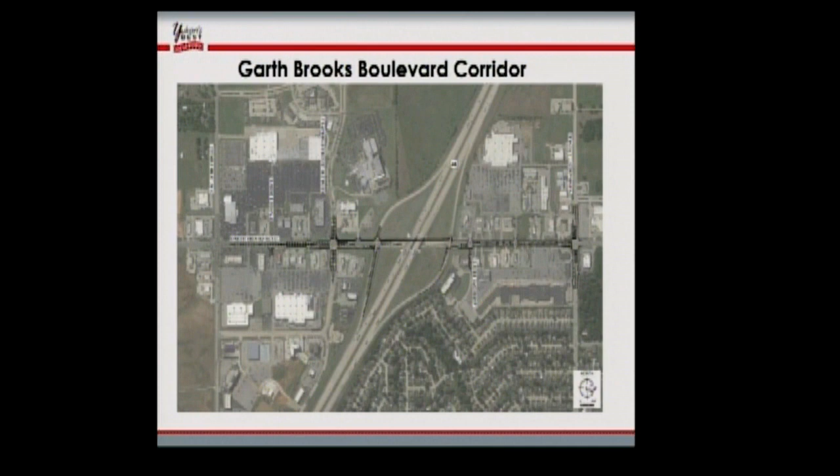We want to talk about the CRISAA grant we got from ACOG and how we worked with them, and how much goes into a project. I was asked the other day, it's a simple overlay, you just mill and overlay it. But when you're talking about federal dollars, there are certain things that have to be done for environmental review, for a set of plans that can be bid. ODOT is the administrator of that. There's a means to the method, and this project right now is estimated about $1 million. This is basically an overlay from Vandament to Main Street. It will fix the spots in the pavement that have kind of failed. This was a relationship-type deal working with ACOG, and we have a couple of other things as we go forward.

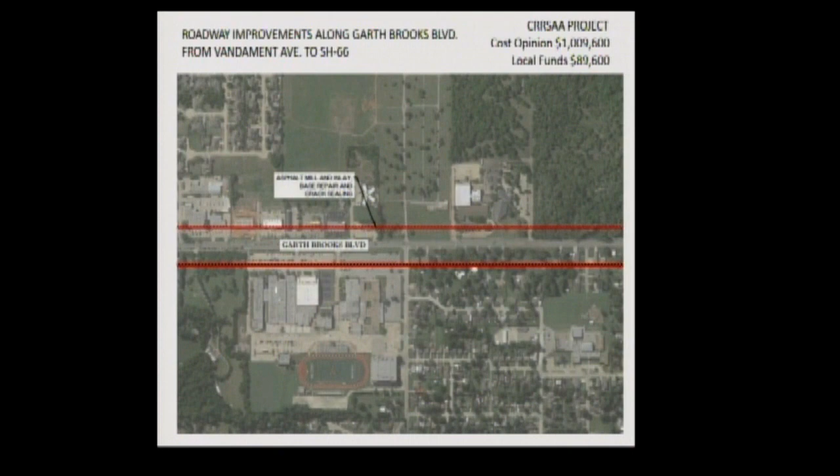On the ODOT side, Tammy has worked real hard with the city engineers to work with ODOT on one of the pieces of the Garth Brooks project, to limit the amount of investment the city's going to have. This was one of the items in the traffic study. We're adding dual left-hand turns coming onto Garth Brooks and coming off Garth Brooks on the on-ramp and off-ramp. This is estimated at $3.2 million right now, a significant investment that ODOT is doing. We do have to do the plans for this project, so we'll also have to pay 10% of whatever the price is.

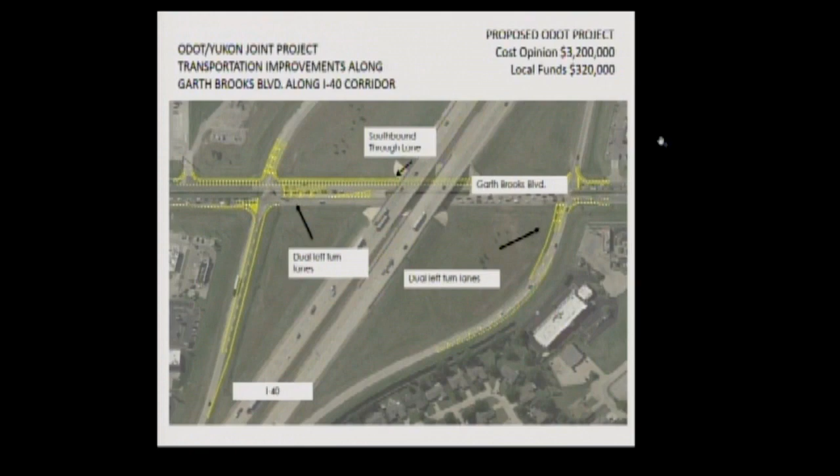One of the things we'll talk about too - multimodal is a big thing, and when we're getting federal dollars, that's why we talk about 10-foot sidewalks or trails, because if you have both, that gives you points in the process. So it gets us some help on these projects. What we're trying to do is the TAP grant, which covers the sidewalk or multimodal trail - this helps in our application. We're trying to put both projects out to bid at the same time, or similar time, or maybe even incorporated together. I don't know how it's going to work, but that's something we're working with ODOT on. It's an $864,000 project. I've asked why we're doing this, but with federal money, multimodal gives other people means to move through or around the project safely with bicycles and walking.

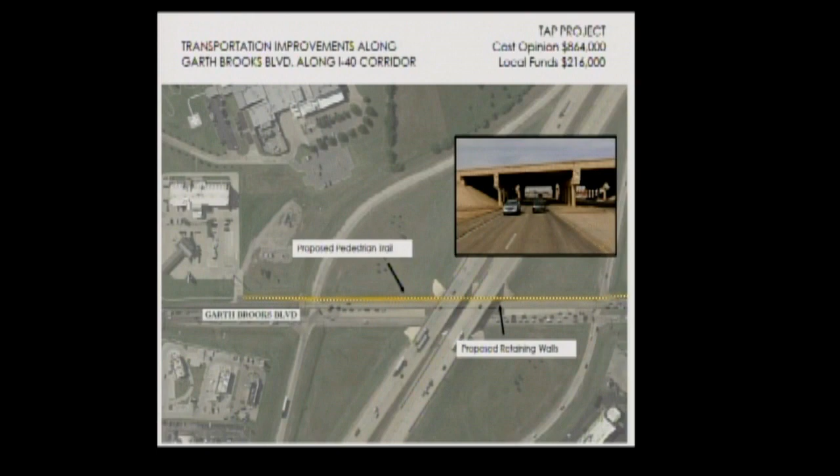And that's why we talk about the Garth Brooks Trail. That was part of the deal. That's probably helped us with the CRISAA grant.

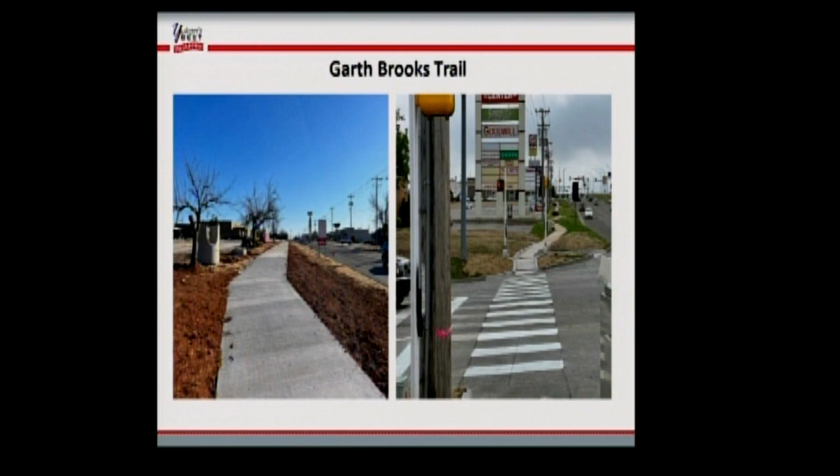As we move forward, we're trying to make sure that we have this multimodal trail basically from Main Street all the way to 10th Street. That allows commerce to go back and forth, so if people want to walk or ride a bike, if there's any conflict, they have plenty of space.

Health center improvement, this is one of the improvements that we did, trying to alleviate some of the problem. There was not a dedicated left turn east or westbound onto Garth Brooks, so that was added at $312,000. So we're trying to do things to alleviate the traffic and help the traffic. I know we get a lot of complaints about the hospital side, they're being delayed a little bit, but we're doing what we can to take care of those issues.

Smart grid, that was a deal where we connected all the lights together with the smart grid system. Basically, the lights before had what they called loops on all directions in the pavement. So we're going from a pavement type system to what they call a camera or detector or smart grid system. With the loops in the pavement, when the asphalt moves, it's actually a wire, it looks like a wire in commercial installation.

It gets nicked, cut, torn just from the pavement movement. That's why we moved to the camera system, because the lights work off that. So we went from some intersections having like 16 loops to what we have today, the smart grid, which is one item. So if we have a problem, it's one item and not multiple loops.

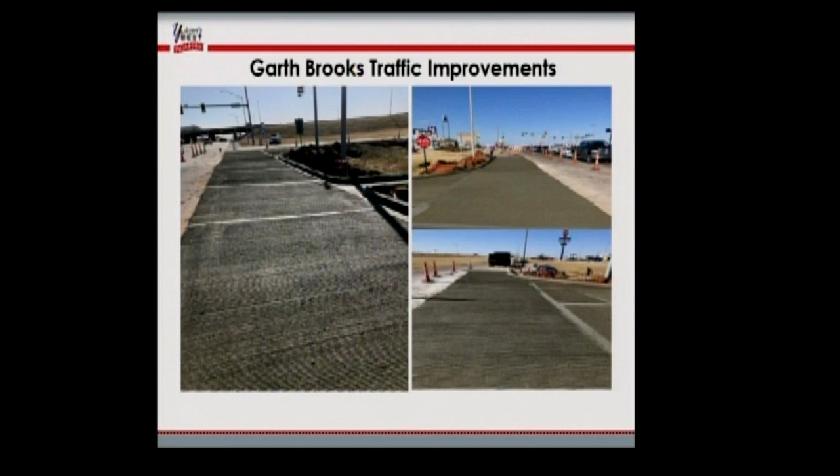This is one of the past projects. The reason we brought this forward, it was broke up into two different phases. There's north of the bridge and south of the bridge. This was a relationship, done with us contracting both of the asphalt projects, but we actually worked with the county for stabilization underneath the asphalt. So they come in and stabilized.

One of the good things about working with the county, they can provide the labor and the equipment, but we have to buy the material to stabilize the base. And they worked with us on this project. Like I said, I wanted to talk about relationships and the importance of relationships, and we have to build those bridges with the council and those entities such as the county commissioners. They're willing to work with us on other projects and have actually approached us, and we'll be meeting with them in the future.

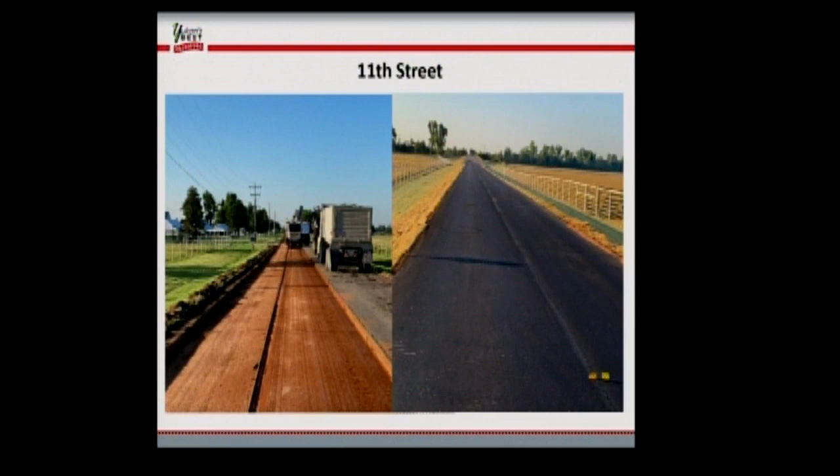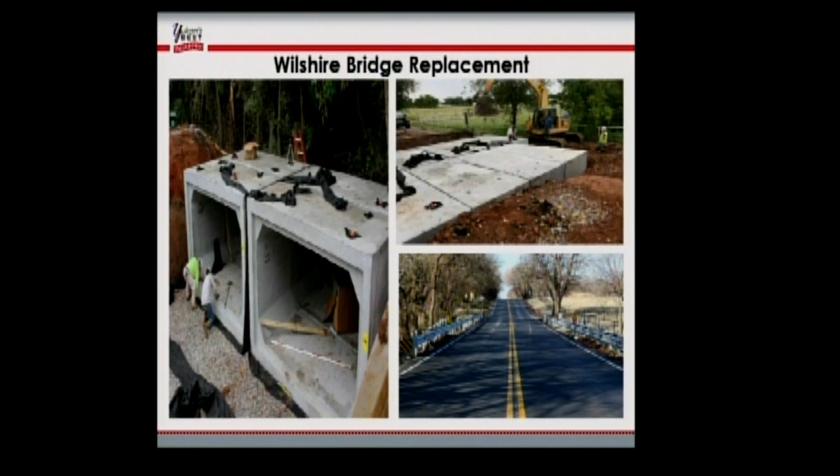Now, this project was Wilshire Bridge as well as the road. This was also a relationship with Oklahoma City, with the county and us. Oklahoma City paid for half of the cost of materials and the project.

The county provided the labor for the base and stabilization. So Oklahoma City has been a good partner on those roads that are half shared by us, as well as any drainage issues that we've had as a shared facility. And that project is almost 1.2 million, and they paid for half of it.

And while we're talking about this, we had worked with Oklahoma City, if you remember right, de-annexing the east portion, basically from 11th Street all the way to our city limits, and they basically have taken on the repaving or rehabilitating of Wilshire going east.

So that saved us quite a bit of money that we did not have to pay. That has been a good relationship, because at the time we did not have the money. I think it was 2.8 million, which we'd have had to pay half of, and we did not have that to spend because we have other needs within the urbanized area.

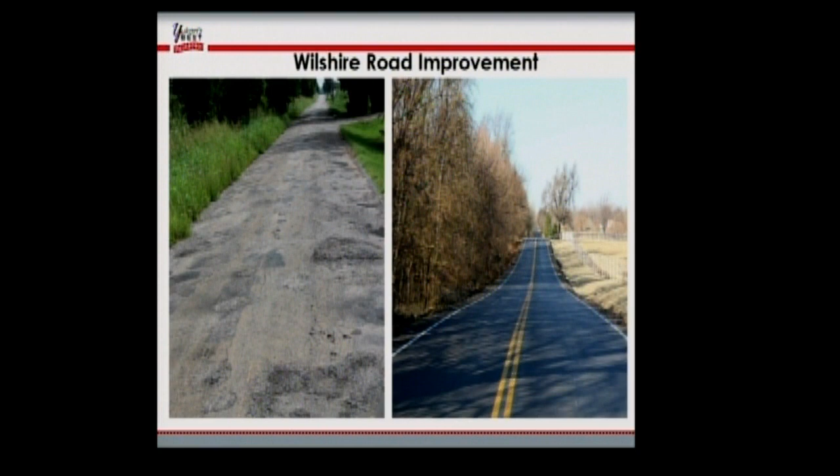We want to talk about future projects as well as what's happening to us. Northwest 10th Corridor, we have some things we'll be bringing to you to talk about. We'll talk about Cornwall and Northwest 10th, but we want to make that a project that is needed, but also we need to consider in the future, because everybody that drives Northwest 10th and Garth Brooks knows about the traffic and the issues that we have.

So this is a future thing that we need to take into consideration. We do have the large apartment complex going in within Oklahoma City city limits, and it's going to impact us even more. The whole idea of looking at 10th Street is to try to get the traffic to move faster and more efficient, so maybe we can take some of that off of Garth Brooks, because people are creatures of habit. If you go down Garth Brooks every day, you're going to keep going down Garth Brooks. This is a relationship deal too, as we're trying to work with Oklahoma City, but they only work with what's in their city boundaries.

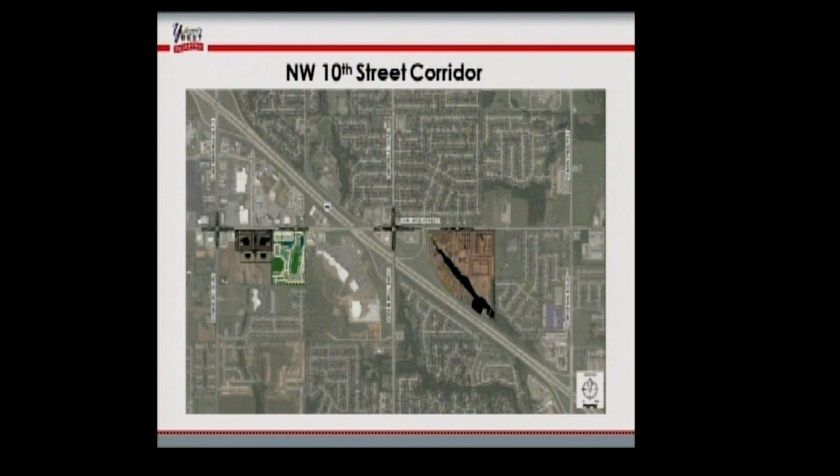We're also going to talk about drainage. We do work with drainage, and this is a proposed project, actually a project that's supposed to be worked on this year. There is some drainage issues at the roundabout at Healthcenter Parkway. With all of the paved surface and the changes in the drainage basin, this is something we're going to have to take care of to allow access to the hospital if somebody comes in from the south. This is estimated about $500,000 right now, depending on what we have to do.

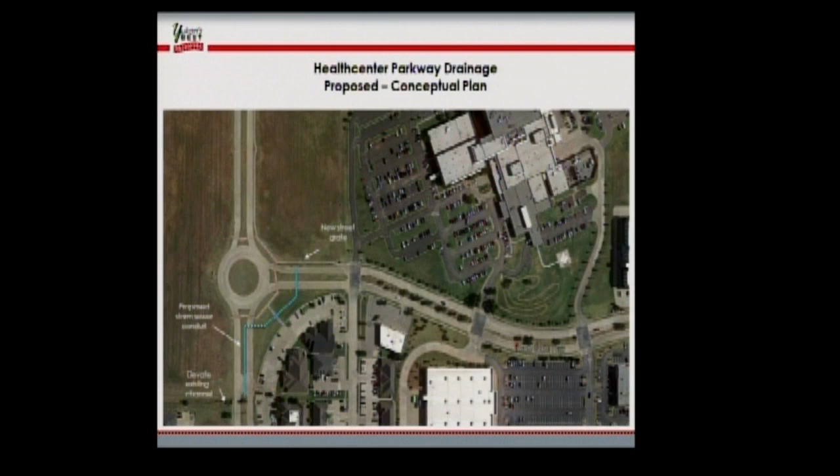This is another relationship project—a box culvert that we had to replace at Sara and Wagner. This is half in Oklahoma City, half in our city limits. As we went through and discussed it, we did this with them and they split it. It was a $117,000 project, and they paid their half.

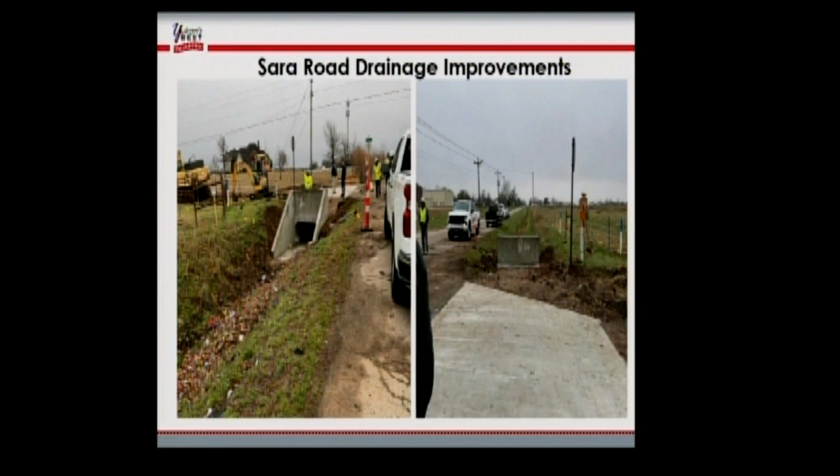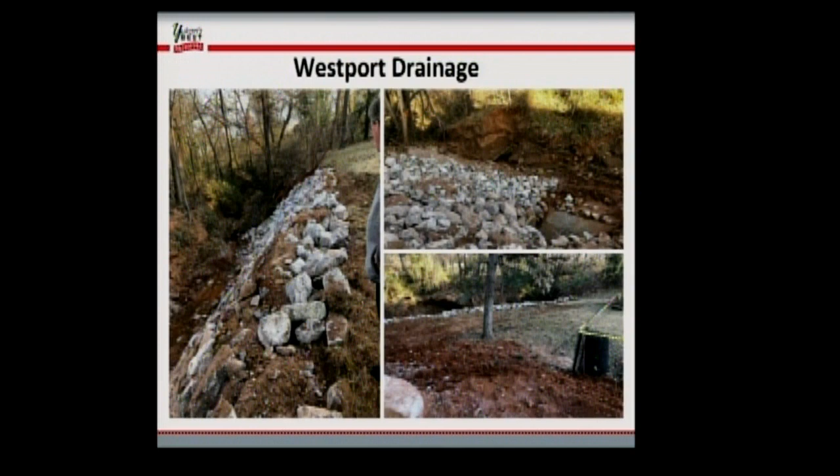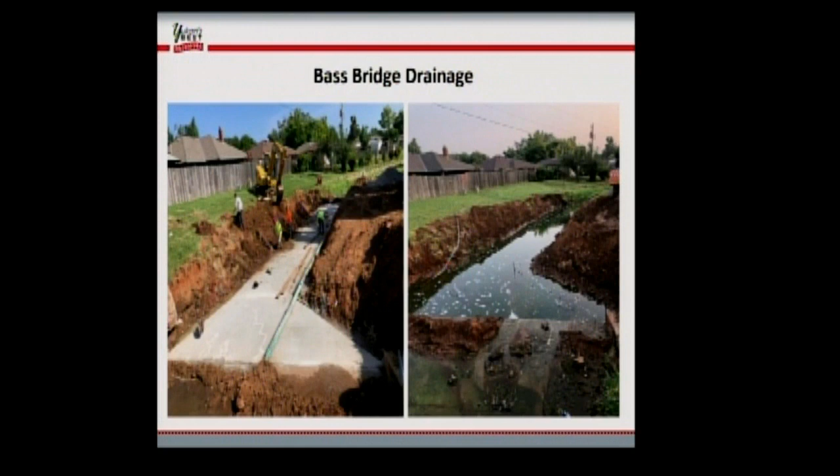Westport drainage—we just want to let you know there are a lot of things people do not see that's hidden behind houses, beside houses, and we're trying to work on those as well. So this is one of the projects we worked on. We also had a Bass Bridge drainage area that we worked on. Like I said, we are looking at all areas—there's a lot of this people don't see that has to be done. This project has been completed, as well as the Turtle Creek drainage project, which was $112,000. Drainage projects are very expensive.

I had an individual approach me the other day asking why we need an engineer on some of these projects. Well, some of these projects have certain issues that have to be looked at very closely. For example, this one is actually in a floodplain and a floodway, so there were special things that had to be engineered, starting with what's called a 404, which involves the state. It has special permitting requirements through the Corps of Engineers, so we had to work on this, and it took several months.

That was the other thing I was asked—why does it take so long for some of these projects? Well, there's a lot that goes on that a lot of people don't realize. Just the engineering alone, like I said, took the Corps several months. There's surveying, engineering, making sure we don't increase flooding or flood anybody else out. Every action we take has a reaction, so we have to look at it upstream and downstream. Our city engineer, Robbie Williams, is real good at that and making sure we do not impact anybody.

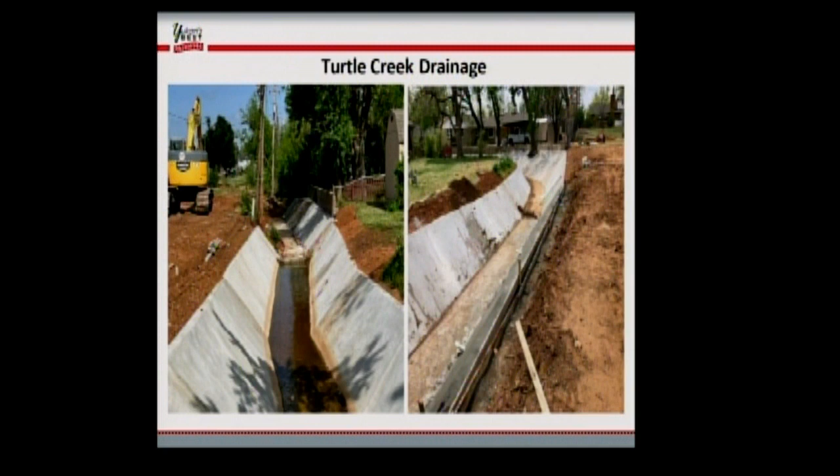This is another one—since all the development in the basin, this is the Kings Ridge drainage project. This is one we're working on this year as well. We're waiting for the surveyor to get everything surveyed, and then we'll do this through our contractor, on contract, on demand.

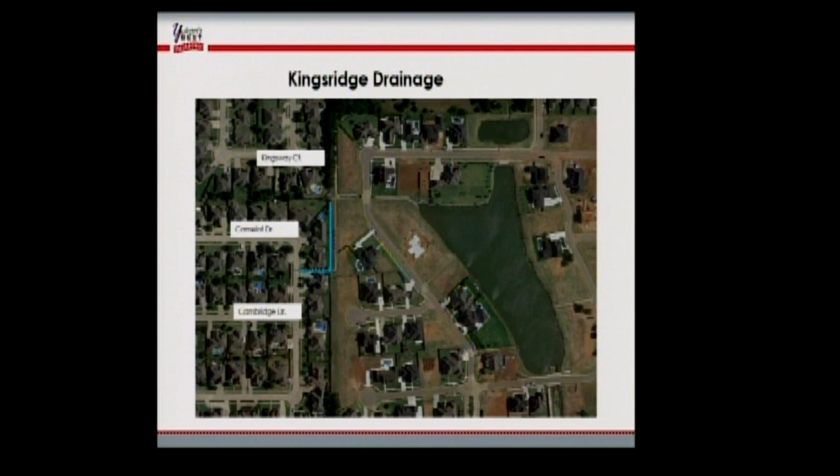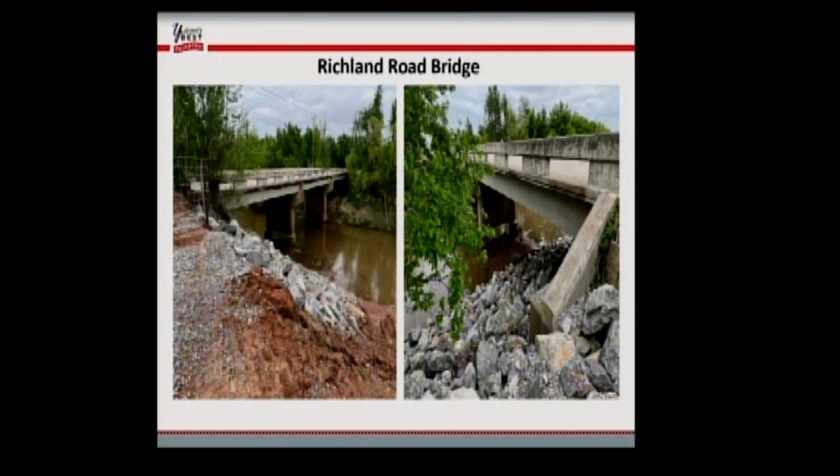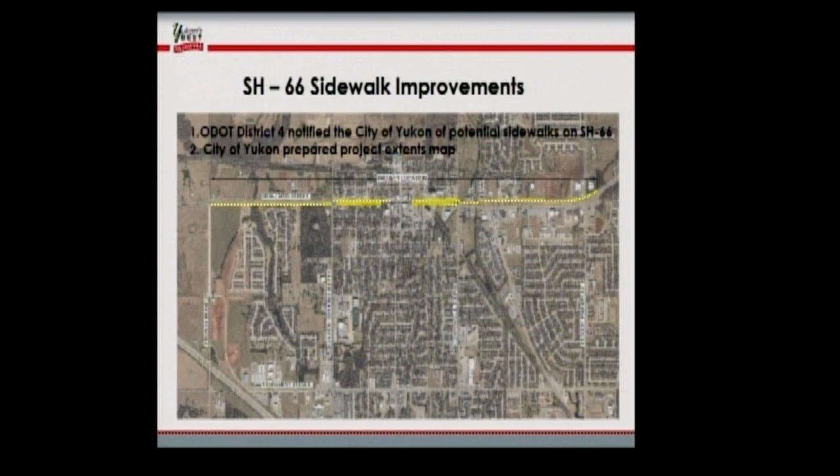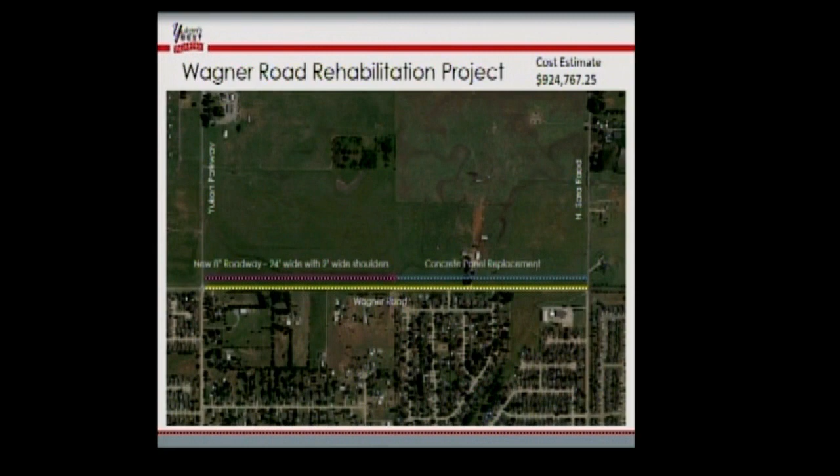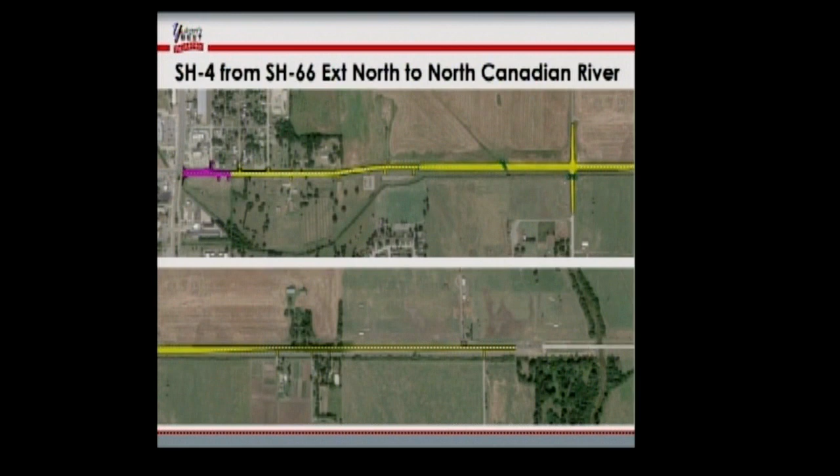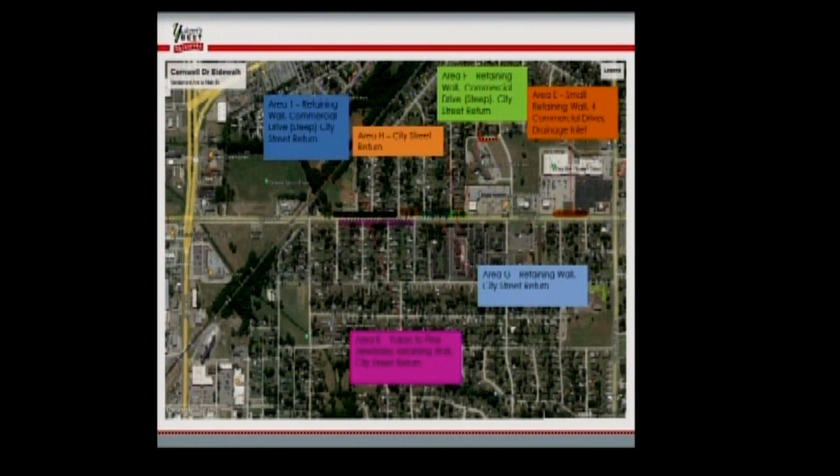Is Oklahoma City paying any of that for their side? No, we're trying to stay within our right-of-way that we actually have control of. If you remember right, we have control of the curb cuts on Yukon Parkway as well as Northwest 10th. So that gives us a wider area, and this is going to be within the boundaries of the right-of-way. Now, we have talked to Oklahoma City and let them know about what's going on just for courtesy.

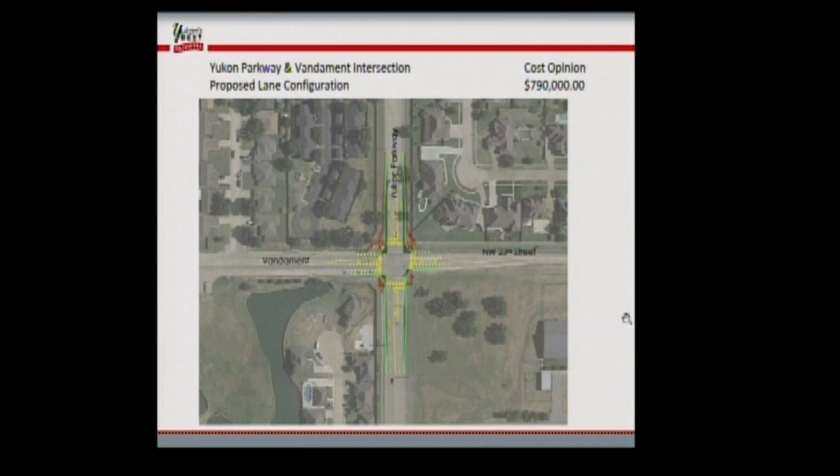Let's talk about the wastewater treatment plant. We've talked about this several ways, but this is a real great partnership with the county that we're going to talk about.

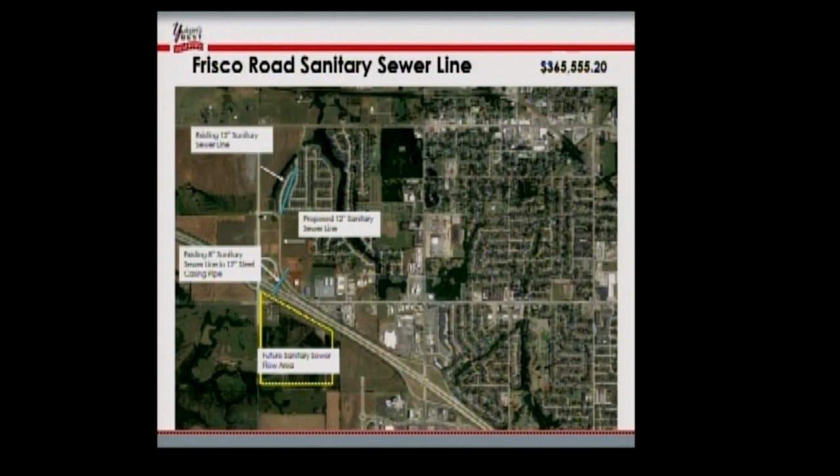Of this project, if you remember right, there was 10 phases, estimated at $8 million. At the time, it was estimated in February 2nd, 2023. As you know, our funds for $8 million, we don't have that in the bank. The county actually had some funds that they were grateful to allow us to access and use for part of this project. They received ARPA money.

With the ARPA money, there were requirements that it could only be used for water, sewer, or storm sewer. So with a lot of talk with the city managers in the county, Tammy, Matt over in El Reno, and Tim in Mustang, they all worked real hard, as well as the mayors in the cities, to work with the county to obtain the funds.

For us, they are giving us $3,725,433 to apply towards this project that they were not able to use. This will go a long ways. We'll still be 4.3, 4.4 million short. So that's something, as we go through the phases, we're going to try to figure out which are the best phases that would need to be done.

Their order will change. We're currently in the design process right now, working with DEQ. Hopefully we can finish that in the next several months and see where we're at, so we can go ahead and get some of these projects going.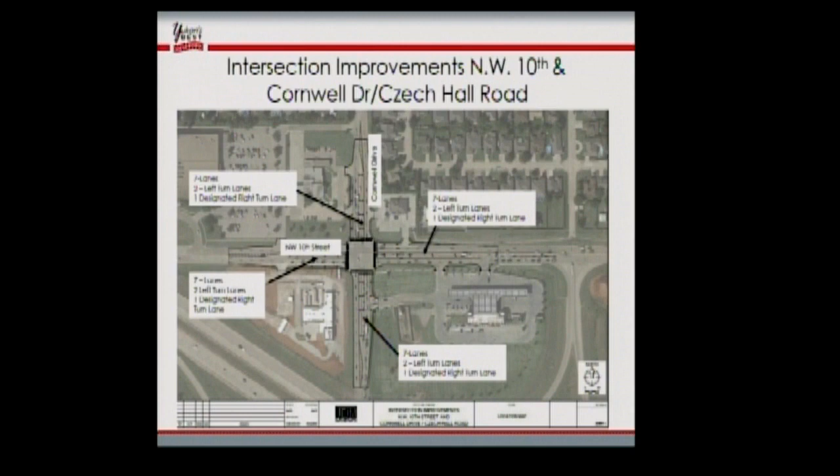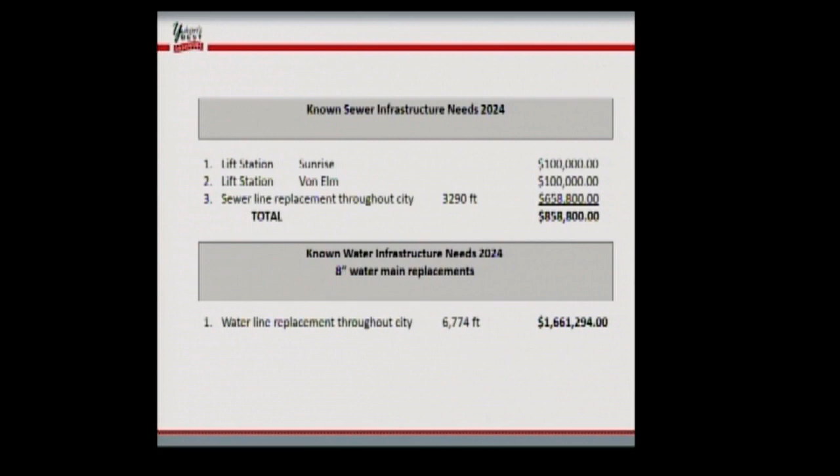As we go forward, these are just some ideas of projects. We got 2 lift stations that need to be upgraded, about $100,000 apiece. We know right now we've got about 3,290 feet of sewer line that needs to be replaced today. We've got about 6,774 feet of water line. This is just a list of streets that we know about.

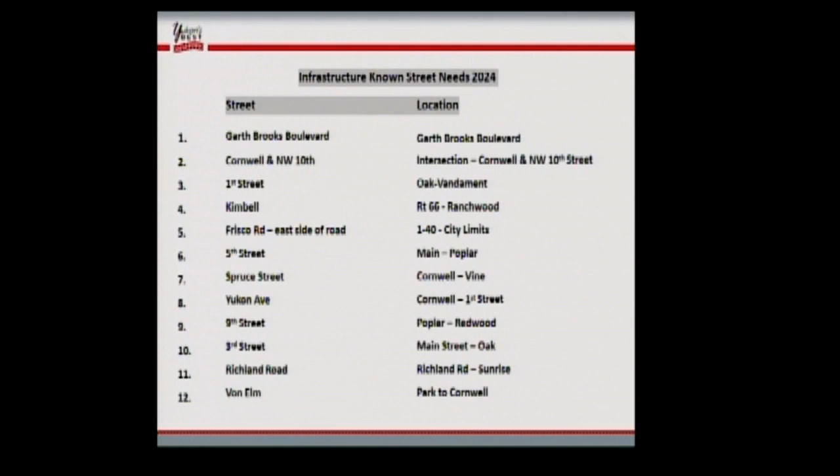We will prioritize those during the budget process and see where we're at. Garth Brooks is one that needs to be really looked at. Cornwell needs to be looked at. We've got First Street, we've got Fifth Street, we can go on and on. But we're trying to do what we can, apply for everything we can, try to get any help we can to work on these streets and maybe get something done.

Possible funding that we would look at is ACOG, TAP grants, CRRSAA grants, STBG, UZA, air quality grants, recreational trail grants, ODOT, the federal government, capital. We talk about partnerships and the importance of partnerships.

We just talked about the amount of money the county gave us to help us with the sewer. Tom Mansky and Dave Anderson, Tracy and Jack Stewart and all those that we've had in the past have been great, and we build these relationships in the council.

As we go forward, there is membership on some of these organizations, and it's important that we're involved, because the more involved we are, the more likely we're going to get some funding that helps. For example, we work with ACOG, which is the group where a lot of these federal funds come through the grant application. Oklahoma City has worked with us on several projects. It has to be in their city limits, but we have relationships with them as well. ODOT is another one that we have relationships with.

So it's just things that we need to talk about as we go forward and make sure we keep those relationships important. That's one of the things, like on ACOG, I don't really have time to be on their board of directors, but I am on their executive board for that reason. Same with Oklahoma City, I meet with Bradley quite a bit, and there's a lady on the south side, and David, because it's important for us to sit at the table and keep that communication open.